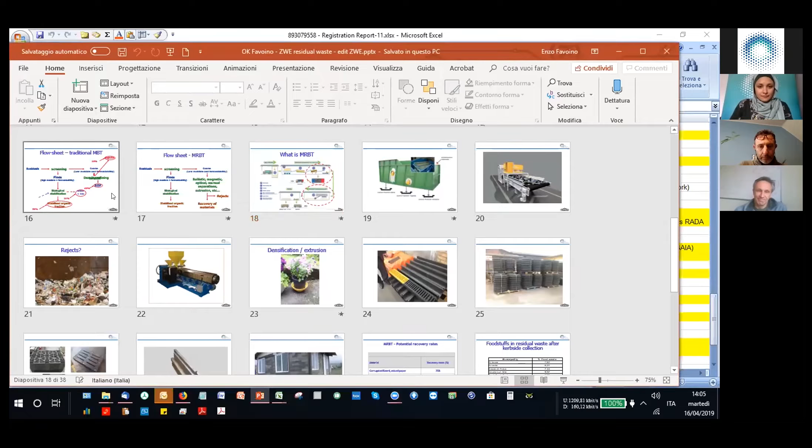Let us set the scene first. And since we know we have got a global audience today, really an impressive set of participants in this webinar, I will be making reference sometimes to the European situation, since it is really setting the scene when it comes to advanced waste management, in particular thanks to the recently approved circular economy package. But of course, I will always try to make reference to more global issues and a wider context.

Anyway, setting the scene. The circular economy agenda, not only in Europe, but also in other parts of the world, everybody's discussing circular economy, sustainable material management, and this is setting the bar higher. It tells us we have to keep ambitious when it comes to material recovery rates.

In particular, we have got a communication issued by the European Commission on the role of waste to energy in the circular economy. And it was dwelling on the possible tensions at the interface between infrastructure in thermal treatment, such as incineration, and the need to have higher and higher material recovery rates. Then we have got a plastic strategy, which was adopted by Europe as a framing document when it comes to management of plastics, and a soon to be issued directive on single-use plastics.

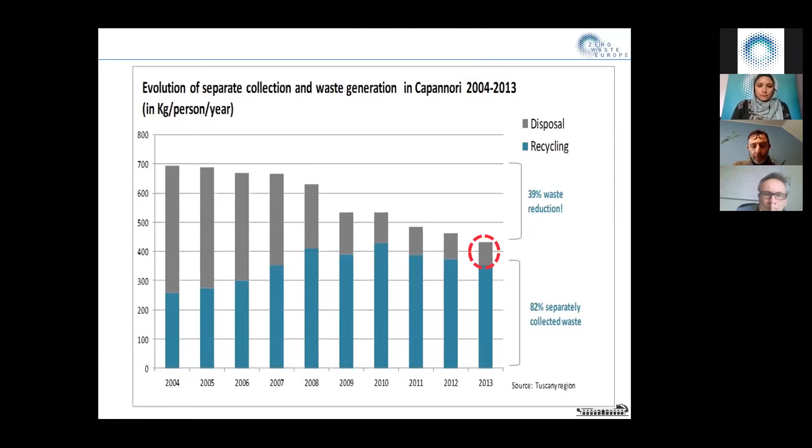But also, if we take a look at the average national data, this is a chart from a few years ago. Let me draw your attention to the data from Slovenia. Slovenia, a few years ago, was at 40%, which was already quite a promising result for an enlargement country, a Central Eastern European country, which was still implementing all the strategies coming from the body of European environmental policy.

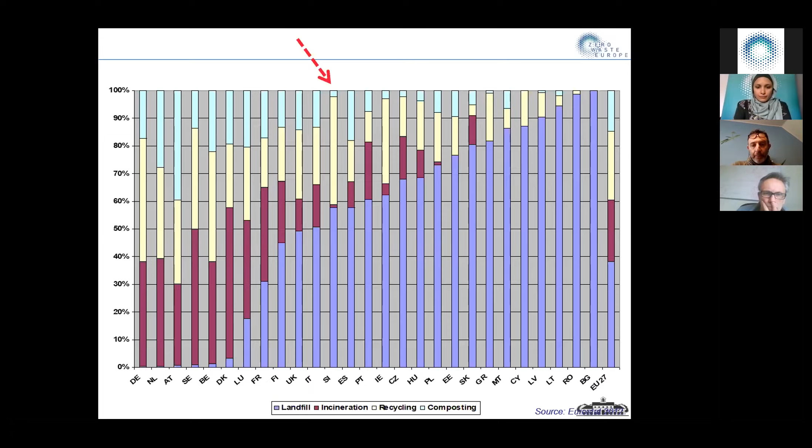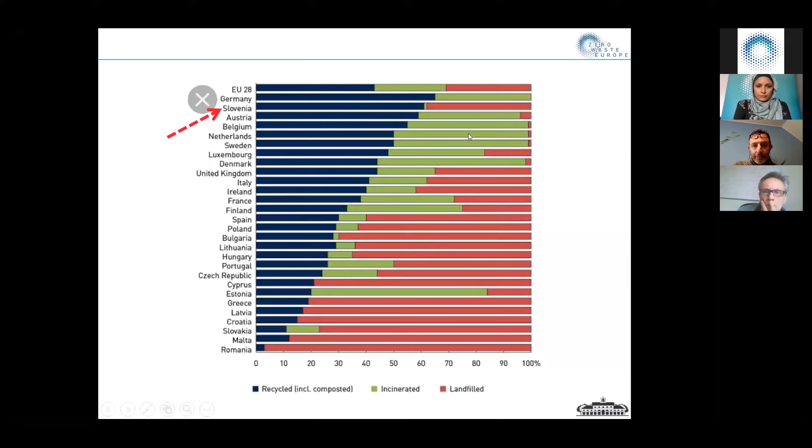But just a few years later, if you take a look once again at Slovenia, Slovenia is jumping on top of the standings for Europe and for the global rankings when it comes to recycling rates. And this is basically related to the fact that they have got a very low reliance on incineration, which is the green part of the bars. Let me try and use the pointer.

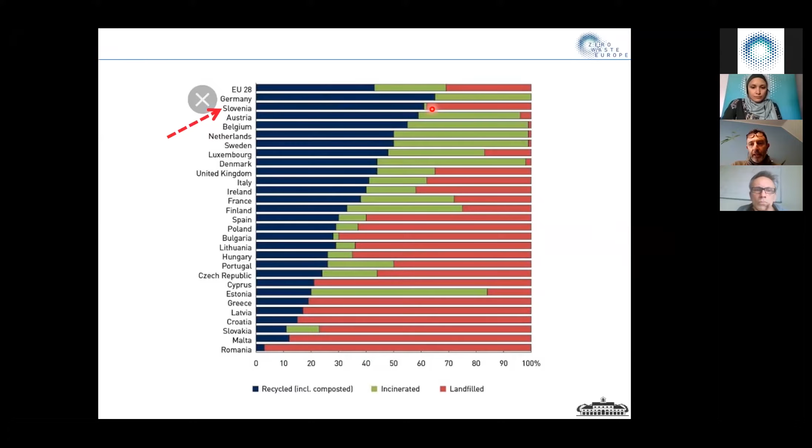Here you can see a very small part, which is reliance on incineration, which is keeping the system flexible, and therefore they can fully deploy the potential of zero waste programs, circular economy, and so on and so forth. By now, Slovenia should already be around 65 to 70% separate collection.

Also, if we take a more detailed look at some districts, waste management districts. For instance, the planning units in Italy are the provinces, which are basically corresponding to counties in the United Kingdom, Landkreise in Germany, départements in France, and so on and so forth. You can see that there's already a good bunch of provinces above 80%, and some of them are already down at 50 kilograms per inhabitant and year residual waste.

And you know, if a province totals a population roughly of 1 million people, this means that residual waste is just as little as 50,000 tons. So a few years ago, with 200 or 300 kilograms residual waste per inhabitant and year, residual waste was at 200,000 tons. But with as little as 50,000 tons, in a planning unit such as a province, it's hard to consider incineration with such a low amount of residual waste.

So what shall we do with residual waste? Because anyway, we have got some residual waste to manage. We need a transitional strategy for residual waste, and this is a global problem, of course. While we pave our ways towards zero waste, we still need to make decisions on transitional strategies for the management of residual waste. There are a few problems with incineration in an ever-changing context.

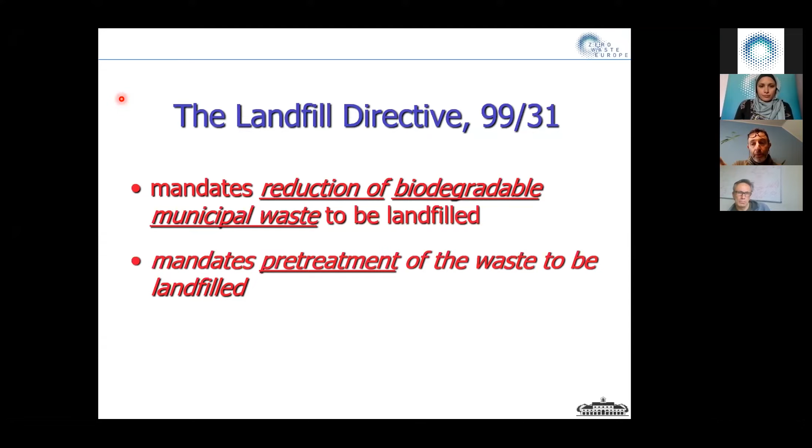But this calls for some type of pretreatment of residual waste, of course. Let's take a look at the way residual waste looks like, and let's go back to Capannori, which I already mentioned. Capannori at present is around 85% separate collection. This is a situation which is fairly widespread by now in different areas across Europe. Whenever you implement zero waste programs, roll out a curbside scheme, include the organics, and adopt a pay-as-you-throw system, you may get quite easily well above 75–80% separate collection.

But the main effect on the composition of residual waste in Capannori is that there is a sharp reduction in the percentage of organics. So let's keep it in mind, because this will affect the possibilities for managing residual waste and the connected needs. There is a concentration of other materials, such as plastics, because not only those plastics which have not been captured through separate collection - separate collection relies on behavioral change, and so much as we target perfection, we have to live with imperfection in daily behaviors by people - but there is also, most importantly, the effect of non-packaging plastics, which are not covered by EPR, extended producer responsibility, and therefore they tend to end up in residual waste, and they concentrate there.

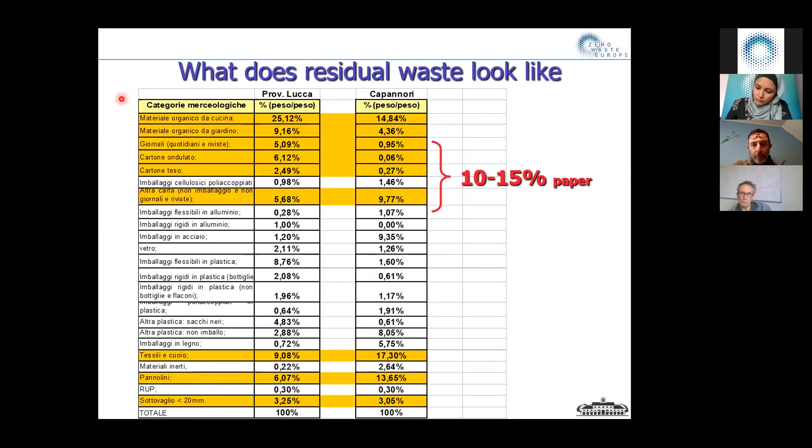So what might be the goals for a consistent residual waste management strategy? We may consider maximizing recovery of materials in order to get aligned with the circular economy vision. We have to minimize reliance on landfilling, of course, and minimize the impacts of landfilling as well. And so we have to minimize fermentability of whatever gets buried into a landfill. But most importantly, we have to keep the system flexible and adaptable in order to cope with the ever-increasing recycling rates and the ever-decreasing, minimizing amounts of residual waste.

This is why we defined a concept which goes under the acronym MRBT. It stands for Material Recovery Biological Treatment. There is a study you may download free of charge from the Zero Waste Europe website. That's a life cycle based study, and therefore it basically dwells on the impacts and environmental benefits of material recovery and biological treatment, whereas during the current presentation, I will mostly dwell on the operational implications and what is the operational potential of material recovery and biological treatments.

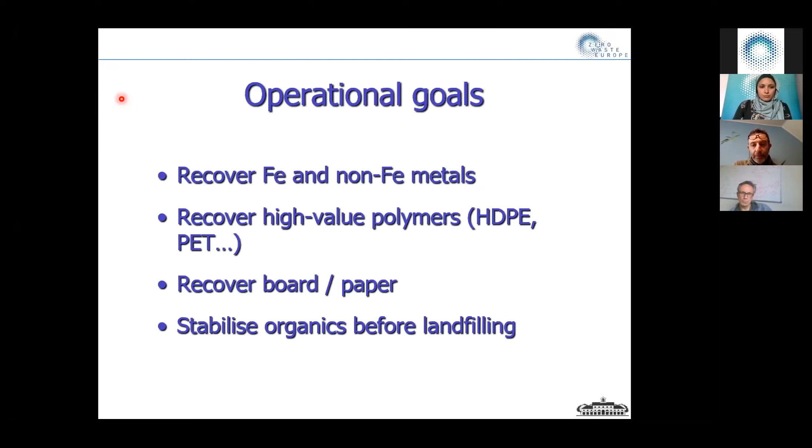So the operational goals - we have just seen the strategic goals - but the operational goals may be to recover metals, both ferrous and non-ferrous metals. This is one of the easiest things to be done, and it's ordinarily being done at whichever type of residual waste management site, since it's quite cheap and easy to recover metals. We may recover some high-value polymers still included in residual waste, such as HDPE, PET. We may recover some board and some paper, which is still included in residual waste. And we also have to consider stabilizing organics before landfilling in order to minimize fermentability of what gets landfilled.

So if we consider a flow sheet for traditional mechanical biological treatment, MRBT, Material Recovery Biological Treatment, is pretty much similar to mechanical biological treatment. And this gives the potential for converting many of the existing mechanical biological treatment sites into material recovery biological treatment sites without such big expenditures.

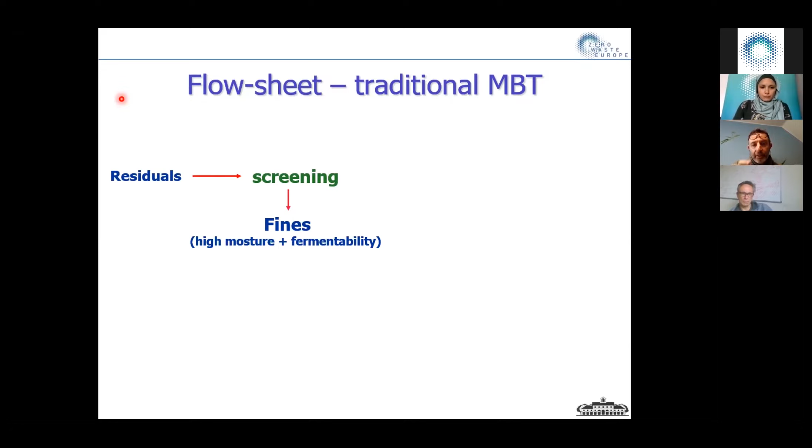You can see with a traditional MBT type of scheme, we have got residuals. They undergo some screening, it's dimensional separation. These screens out the fines where dirty organics are included. They show high moisture and fermentability. They may undergo biological stabilization, which is nothing more, nothing less than a compost-like type of process.

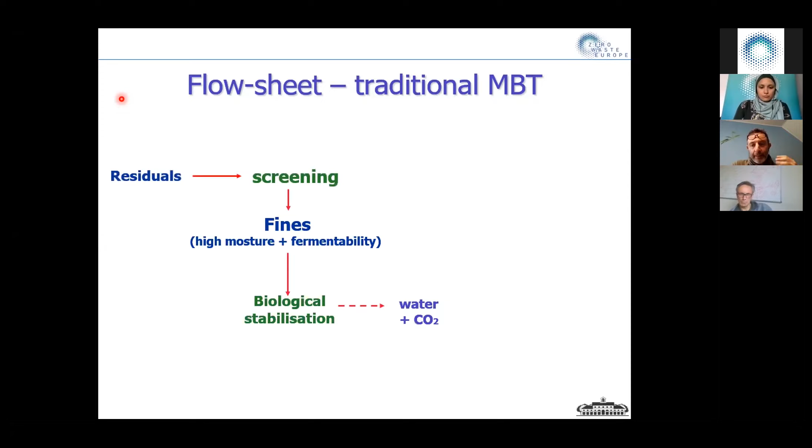It therefore has some process losses - water vapor, carbon dioxide - and in the end of the story, we have got a stabilized organic fraction with reduced fermentability.

On the other hand, from primary screening, we have got the coarse materials with low moisture and low fermentability, and they may be landfilled as they are, as a low fermentability material, or traditionally, most often they were undergoing some density refining in order to produce RDF, refuse derived fuel.

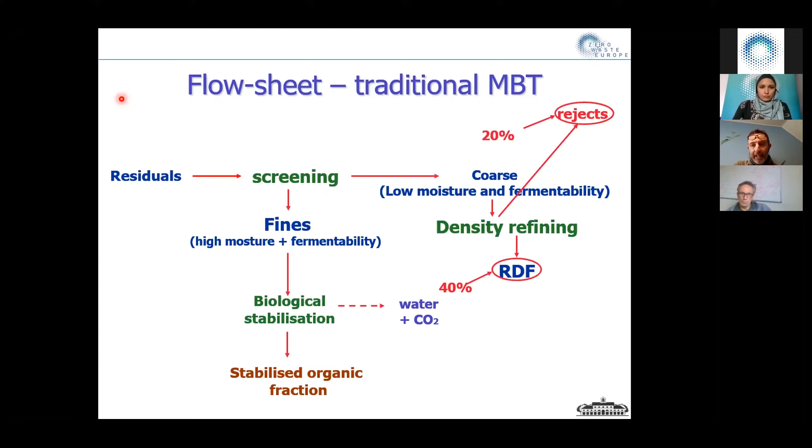There are some rejects from density refining. This is a typical mass balance: 20% rejects, 15% mass loss from process losses, water vapor and carbon dioxide, 40% RDF, and 25% stabilized organic fraction.

So in the end of the story, what goes into the landfill body would be 25% stabilized organic fraction, 20% rejects, and in case you don't refine RDF, also 40% RDF.

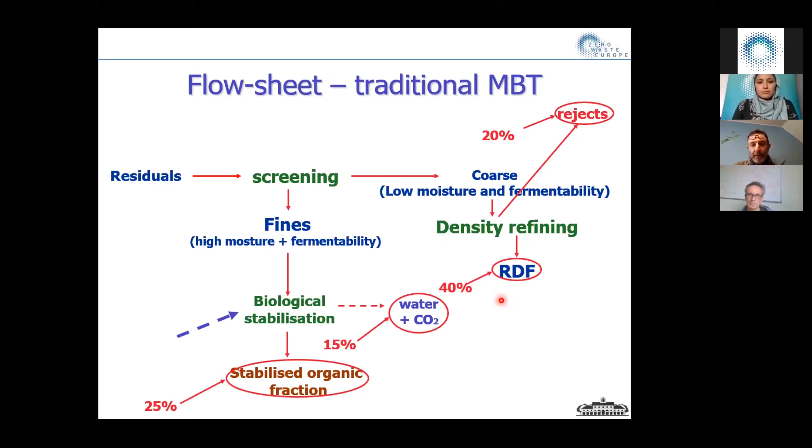But the most important thing is that the stabilized organic fraction underwent biological stabilization, and therefore fermentability and the impacts related to fermentability are minimized.

With MRBT, you have got a change in the operational scheme for the coarse materials, and they undergo sequential selection, such as ballistic separation, in order to separate bidimensional materials, such as plastic sheets and cardboard, and three-dimensional materials, such as bottles, cans, and so on.

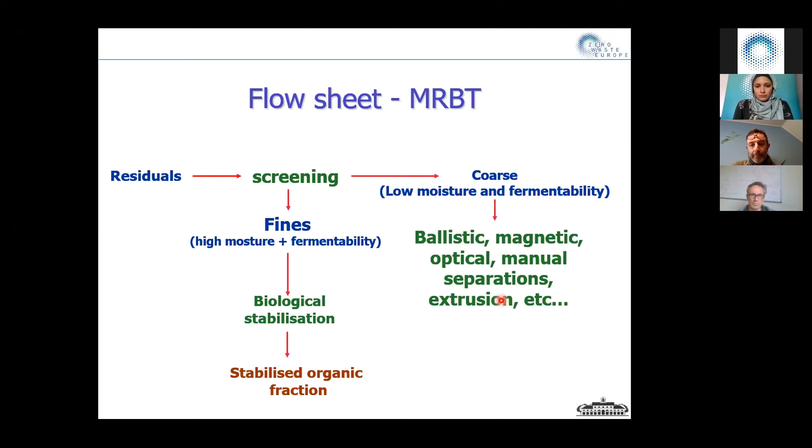Then on both streams, you may have magnetic separation, optical sorting in order to recover paper and high-value polymers, manual separations - for instance, for the big plastic sheets - extrusion for the low-grade mixed plastics, and so on and so forth. And so you may enhance and maximize recovery of materials.

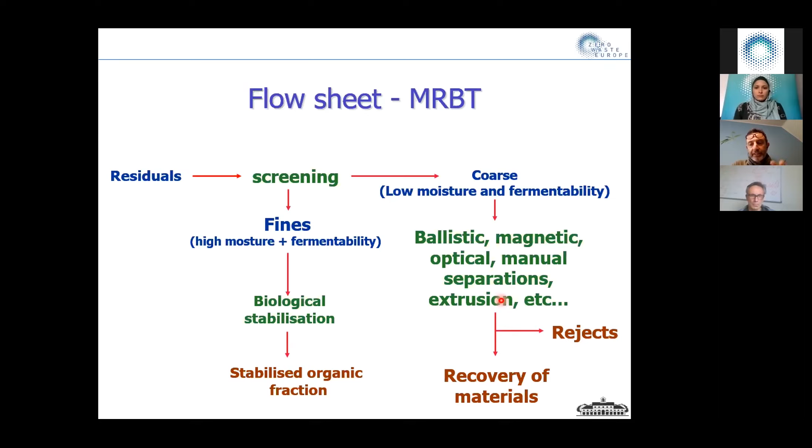Of course, also from separations, you tend to have some rejects which will have to go into a landfill.

So you understand that both may be, at a later stage, applied to materials coming from separate collection - clean organics from separate collection of organics, or plastics coming from separate collection of plastics.

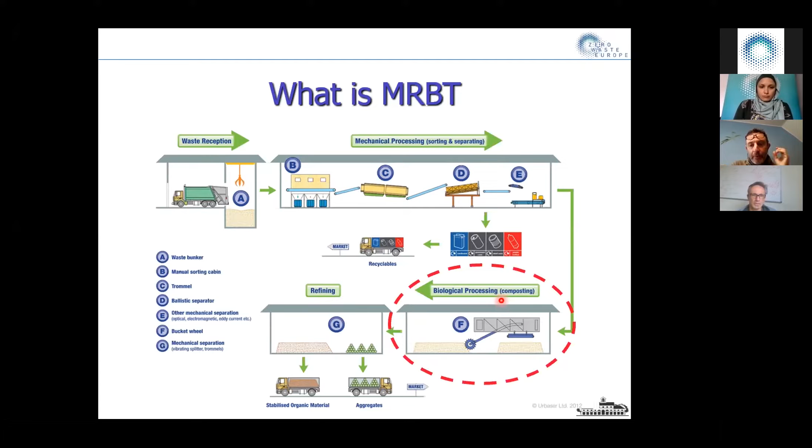So still keeping the financial balance, a financial viability of the system, you may work on dwindling amounts of residual waste, having them replaced by clean materials coming from separate collection.

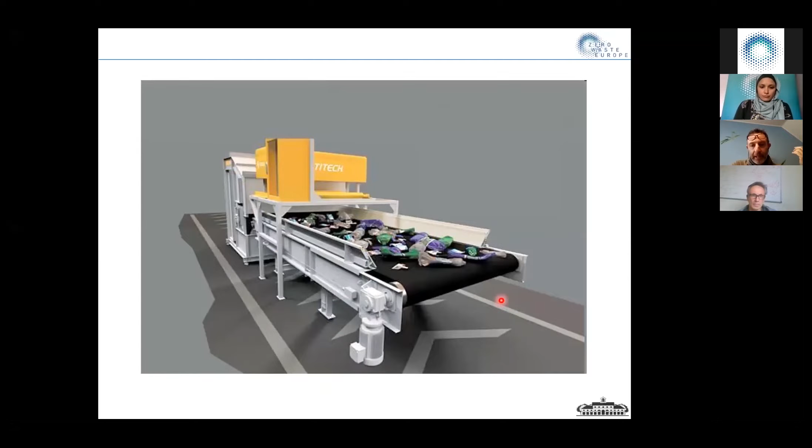These are some very quick examples of ballistic separation, the previous one. This is an optical sorter. Then you may have the end-of-line rejects from the optical sorting lines, which is basically mixed plastics.

And I find it hard to call them rejects. Actually, they may undergo some extrusion, and this may turn them into durable materials, such as pots, drainage pipes, and similar materials.

These are lids for manholes being used in place of the steel ones, and meeting the relevant standards for the sector. But as you can see at the bottom, they have got wooden pallets, so you understand what I'm thinking of.

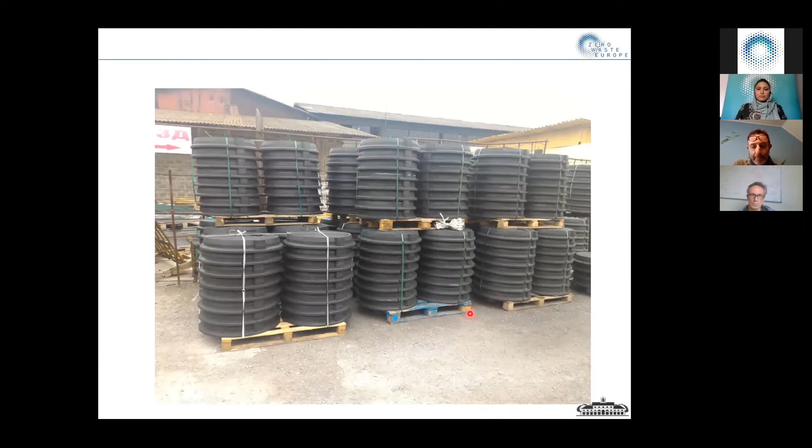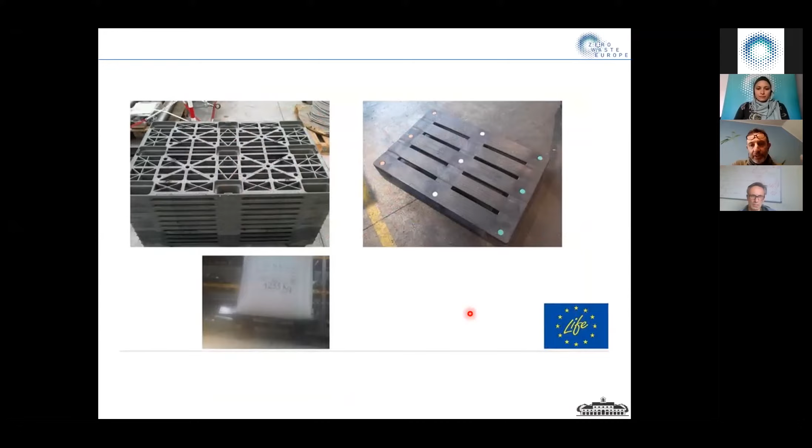What crosses my mind is the possibility to use such mixed heterogeneous plastics also to replace wooden pallets by means of plastic pallets. So it's always durable stuff which may be used again and again and again.

Or building blocks - this is Conceptos Plásticos. It's an initiative coming from South America to make housing also for poor people who can't afford having traditional houses.

So in the end of the story, they may meet relevant standards and they may be used for different applications. There are two preconditions for material recovery biological treatment to work efficiently.

One is technological evolution of dedicated equipment. By now, we have got very good potential recovery rates for

cellulose-based materials such as mixed paper and board, very high possibilities for optical sorting of different plastic polymers, and the highest sorting possibilities for metals.

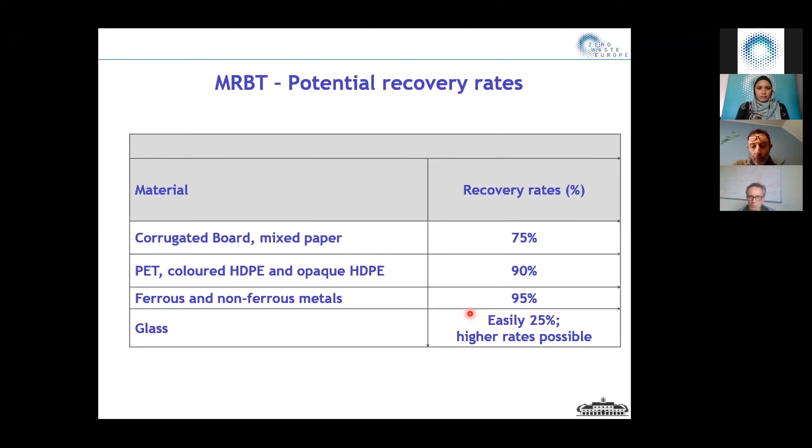For glass, it's lower. But another underlying condition is to have a very low percentage of organics in residual waste, because organics in residual waste makes residual waste dirty and sticky, and therefore the operational efficiency of the equipment would be low.

In Europe, there is a specific driver for separate collection of organics, established by Article 22 of the new Waste Framework Directive, which stipulates an obligation of separate collection of organics starting with 2024. So such situations will be more and more widespread.

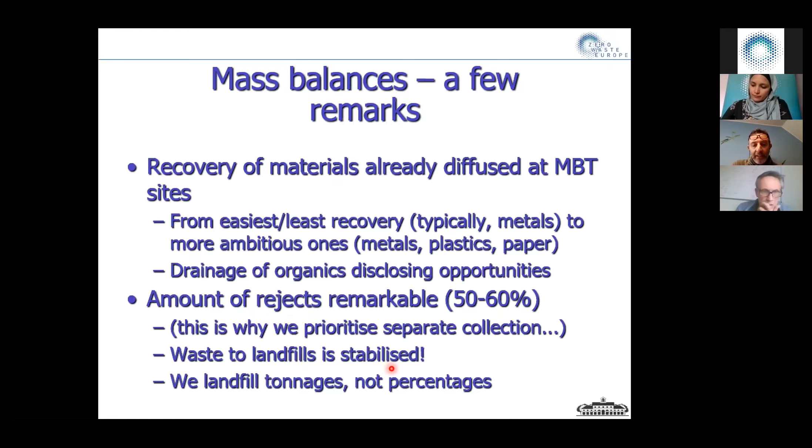In the end, waste we send to landfills is stabilized, and always remember, we are landfilling tonnages, not percentages. Consider: do you eat more if you get 100% of a cookie, or if you get 30% of a cake? You know what the answer is. 30% of a cake fills you much more than 100% of a cookie.

So basically, what we have to do in order to minimize landfilling is to keep the system flexible, so we may work on minimizing residual waste, so that percentages of rejects from management of residual waste apply to dwindling tonnages of residual waste.

In a zero waste district, they only produce as little as 350 kilograms per inhabitant per year. 85% of that is recycled, so residual waste is just as little as 50 kilograms per person per year. But above all, since they have no lock-in effect, because there is no incinerator there, they may keep working on maximizing separate collection rates and minimizing amounts of municipal solid waste.

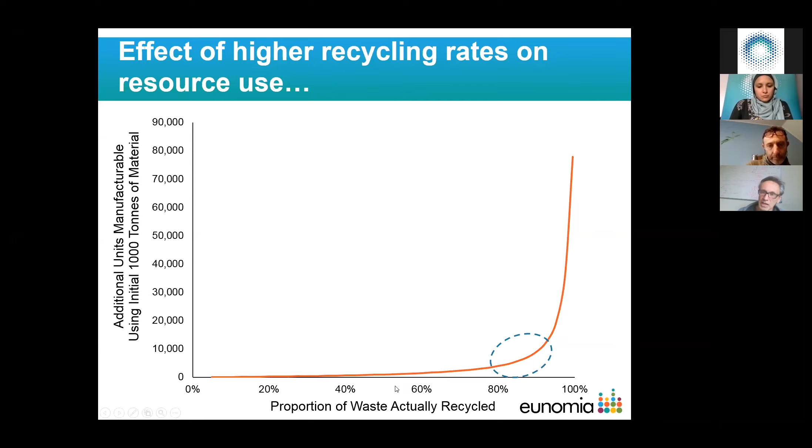That's why we're talking here about moving towards a circular economy. We want the impact of whatever consumption we are still responsible for to be creating less effect. And clearly, as we go to a much more circular economy, the impact of that consumption declines.

This is recent work we've been doing with the Welsh Government, which has already set itself an ambitious target of 70% recycling. Not all of those climate change gains have been made, even at 70% recycling. We can go further, and even going from 70% to 80%, we still find a significant improvement can be made.

And that's where we need to be moving if we're going to address the twin issues that confront our planet: climate change and resource constraints. They're two parts of the same coin.

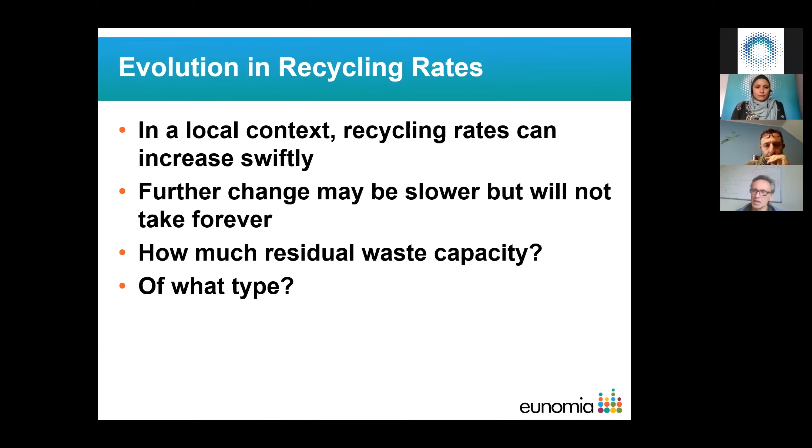And so in that context, you're faced with this question: how much residual waste capacity do I need, and of what type? These are really important questions that are being addressed by municipal waste managers literally day after day.

So landfill, do you know one of the best things about landfill is it's what we call a stock facility. It's something that's there and it doesn't have a fixed throughput. It fills up over time. And to some degree, you're not that worried about the pace at which it fills up. It doesn't completely drive the economics of the system. Of course it does to some extent.

But if your facility is filling up slightly more or slightly less from one year to the next, it doesn't matter so much. And that's one of the best things about landfill, possibly the only good thing about it, is it's really flexible. You can put as much or as little in from one year to the next as you're going. So if you're trying to develop your recycling system and you're worried about having too much residual waste treatment capacity or even too little, it's actually an interesting solution.

But of course, we know it's not great from the perspective of climate change. And one of the big issues is the emissions of methane. And there's a long discussion we could have on this webinar about how effective landfills really are at capturing the methane that's emitted from them. And you get very varied views on that. But there are also other emissions to atmosphere, volatile organic compounds, polycyclic aromatic hydrocarbons.

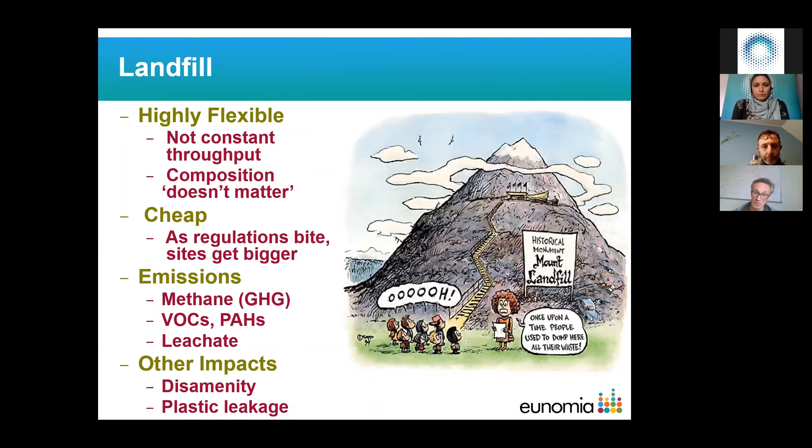And quite importantly these days, if we've got relatively poorly managed landfills and lots of plastics arriving onto those sites, then those plastics can blow around and they can easily escape into the environment. A lot of work is being done to understand just how much of that happens and to what degree in what places. Its key advantage, if you're looking at zero waste, is that it's flexible to the change in the quantity that you're sending there. The key drawback, though, of course, is its environmental impacts.

Now, incineration is often touted, of course, as the solution. It is much more capital intense, as Enzo was saying. Instead of being 250 or so for MBT, it might be around €1,000 per tonne, maybe a little lower. But it's relatively inflexible in terms of the economics, in that it commands a constant throughput. It's quite difficult to go to a bank and say, I'm going to build this incinerator tomorrow. Can I get a loan from you to build it?

And if you're asking the bank for that money, they'll generally ask, okay, well, how much can you guarantee that you're going to be treating from one year to the next? And so what often happens, not always, is that in the contracts struck between municipalities and the operators of incineration companies there may be an agreement to supply the material to that facility. And there may even be a minimum tonnage guarantee within that contract to underpin the financing of that facility. And so it can start to pull waste in. And a lot of people say, well, incineration can undermine recycling.

In terms of the environmental forms, it's quite interesting because Enzo was showing how the composition of residual waste might look. Composition of residual waste is really a fascinating issue because everybody tends to concentrate, when they're talking about a particular material, on what that means for the residual waste. But if I captured 70% of every material that was in the waste stream, I'd have 30% of everything left. And the composition of what I was left with would look exactly the same as what I started with, in principle.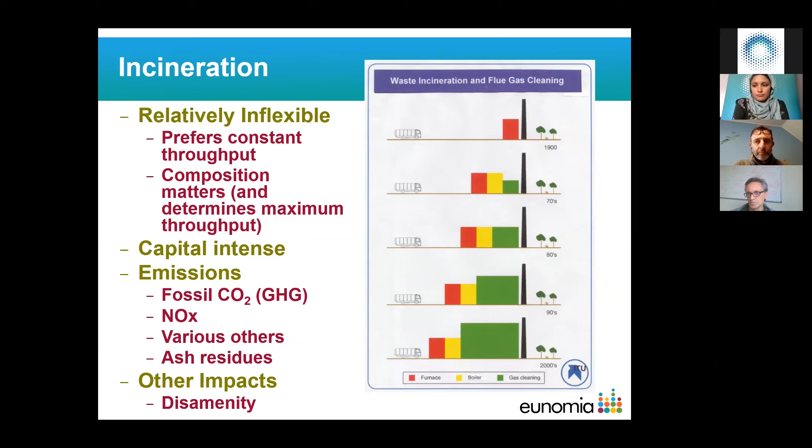The other impacts are, again, disamenity, and those tend to be even higher for incineration plants, partly because of where they're located, because the disamenity is partly a function of the housing density around the facility. So, is that a problem? I literally did this for this presentation today.

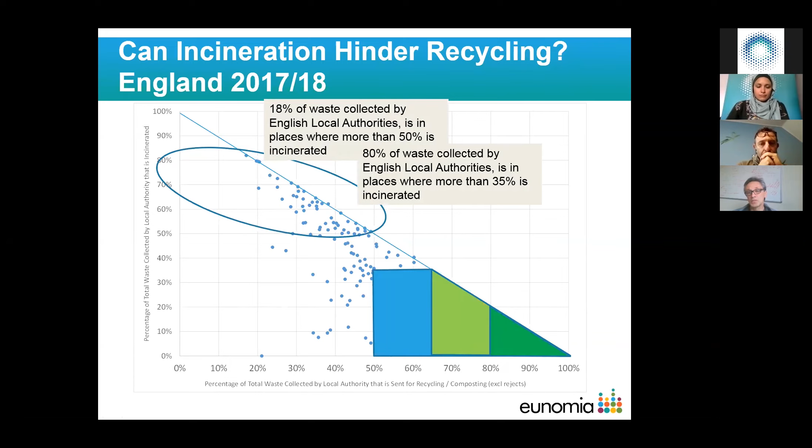And what's interesting is 18% of waste collected by English local authorities is in places where more than 50% of the waste is incinerated. If I want to get to 65% recycling, I've got an even bigger problem facing me, because 80% of the waste that's collected by English local authorities is in places where more than 35% is being incinerated.

So doing the mathematics around that, if those authorities can't change the amount that they're incinerating and can't reduce that, then the remaining authorities who aren't doing more than 35% incineration don't have to meet 65% recycling, they have to do 75% for the whole country to get to the 65% target. Now the detail will depend on the contracts, but it shows how incineration can sort of get in the way.

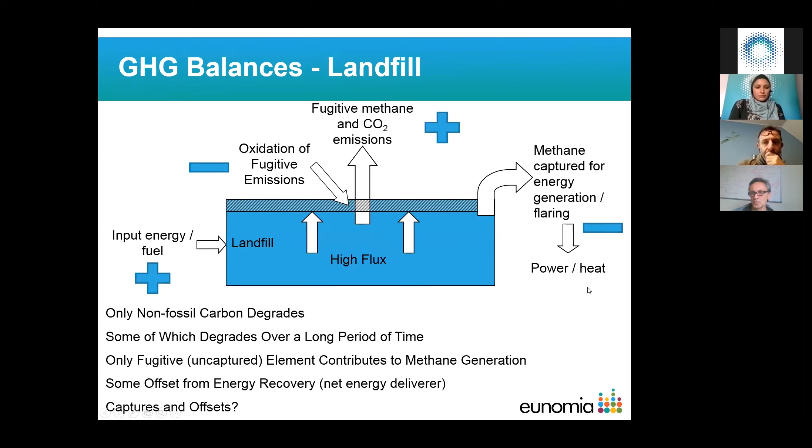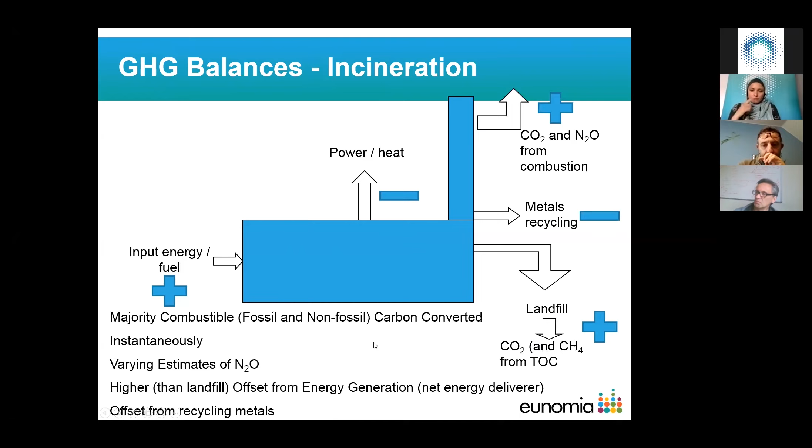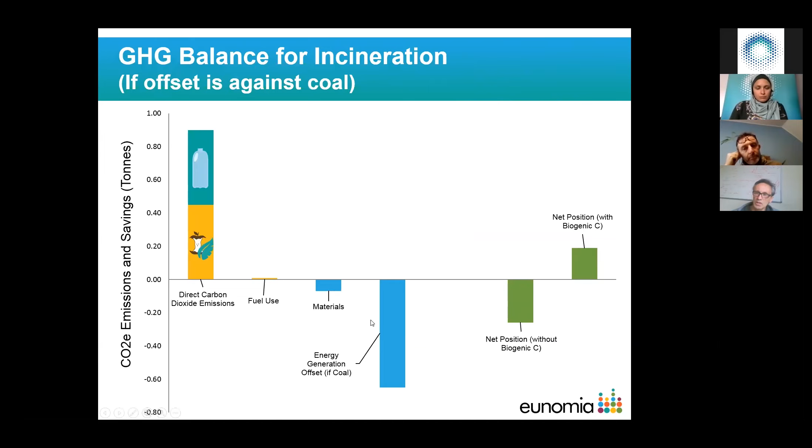And my net position, if I ignore, as international convention says I should, the contribution from the non-fossil element, from the food waste, the garden waste, and so forth, that position, I can almost say, well, look, I'm making a good contribution to climate change. It's great, isn't it? Okay, yeah, but that's because I was assuming I was avoiding generating energy from coal, and coal's a carbon-intense fuel. We're completely in a nightmare situation if forever we're going to assume that the source of electricity we're going to use is coal.

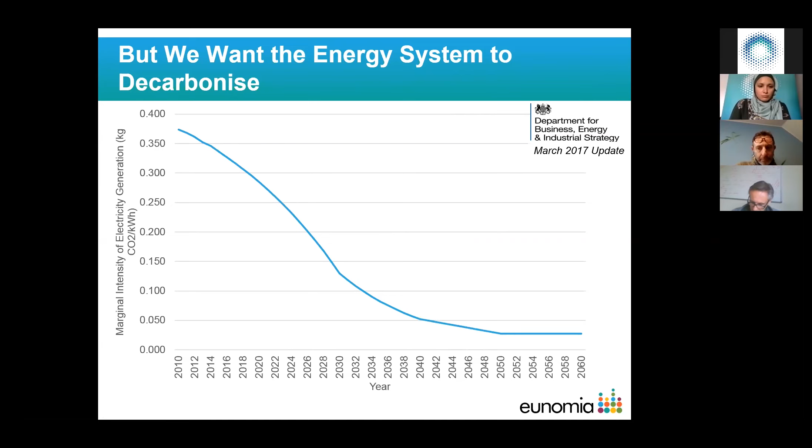If you're saying that one of the key benefits of your facility is the generation of energy, you have to consider what the benefit of that might look like over time. That will vary depending on whether you're generating electricity or whether you're generating heat, because we expect heat to decarbonize slightly more slowly than electricity. And so it may be that a better option for incinerators, for example, is to be focusing more on the use of the energy as heat than as electricity.

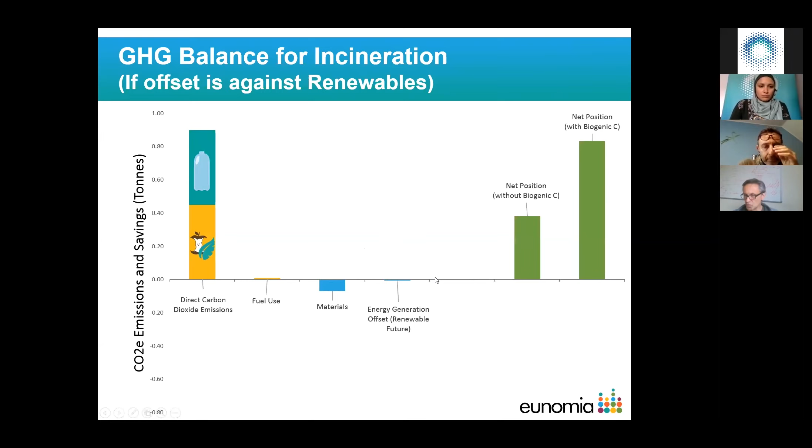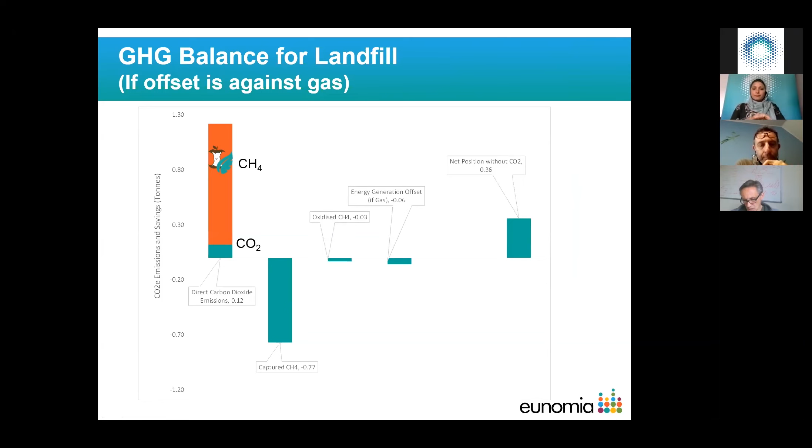So to sum up, if we think the best option of those ones we've been looking at is where we are burning waste and we're assuming we're avoiding coal-fired power generation. But in the UK, we just banned coal-fired power generation. We can't claim that we're going to be displacing coal-fired power generation anymore. And if any one country is claiming that that's the background source of electricity, then frankly, we can all go home and live underwater in 20 years' time. We've got to face this crisis.

So a landfill that has 70% gas capture, which is more or less what my government assumes, if I exclude the biogenic CO2, which is what the international approaches say I should do, then I'm basically into a pretty decent situation where I'm assuming I'm avoiding gas-fired generation. And at that point, I'm more or less in the same situation as an incineration plant.

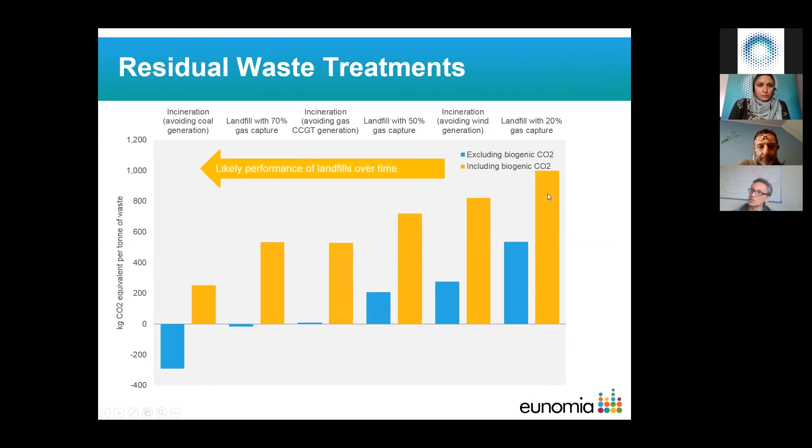A landfill with 50% gas capture is, of course, worse than a landfill with 70% gas capture. And an incinerator avoiding renewables, wind power generation, is worse than an incinerator that's avoiding gas generation. And a landfill with 20% gas capture is worse. But over time, that's the likely performance of landfills as they get better at capturing the gas. Over time, that's the likely direction of performance of an incineration plant, because the principal determinant of that effect is the decarbonisation of the energy system.

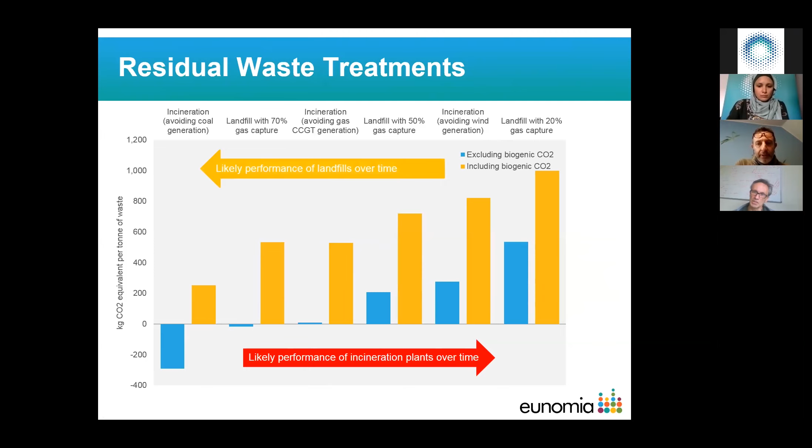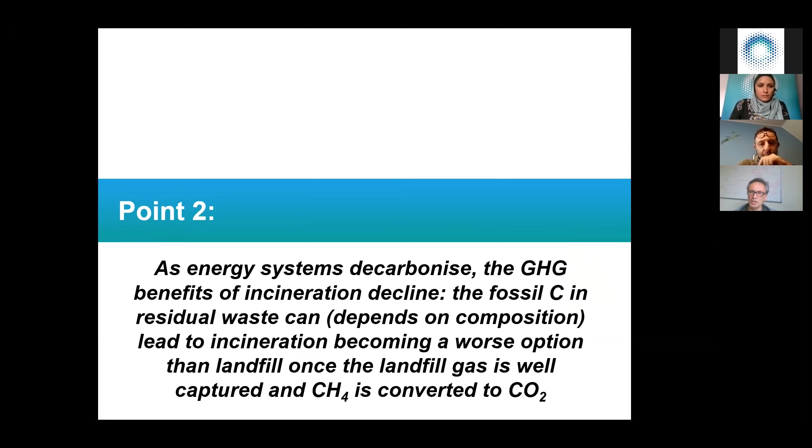So, as energy systems decarbonise, greenhouse gas benefits decline. Okay, we're in an interesting situation. Point 2. So, it's not the case that incineration will forever and always be better than a landfill. But that doesn't mean landfill's good. It just means incineration is not as good as it was in the past. So what's the best thing to do?

So first of all, Enzo is talking about sorting waste. I'm not going to spend a lot of time on the technology, but what's happened is we've got far better resolution in the sorting, far faster speed of the sorting, cheaper sorting. And we can now get marketable outputs from the metals, from the plastics, and increasingly, even from mixed waste, we can take out waste, separate it by polymer and by color. We can then take it through a hot washing process and take it back to next to virgin quality material.

Not just the extrusion that Enzo was talking about, but high quality polypropylene, PET if it's not already collected in a deposit scheme, and so forth. We can get high quality material through the hot washing processes. We can get some paper and card, we can get glass, and we can get some inerts. Of course, we don't get anything like the quality of paper and card as we get through separate collection systems. It may be more difficult to get really well color sorted glass.

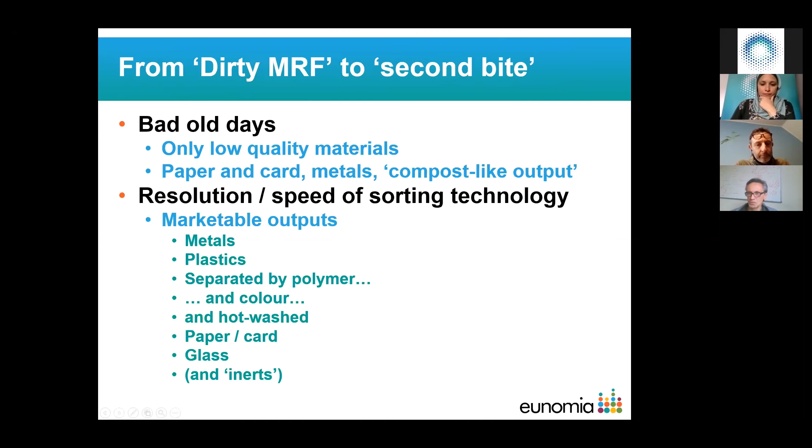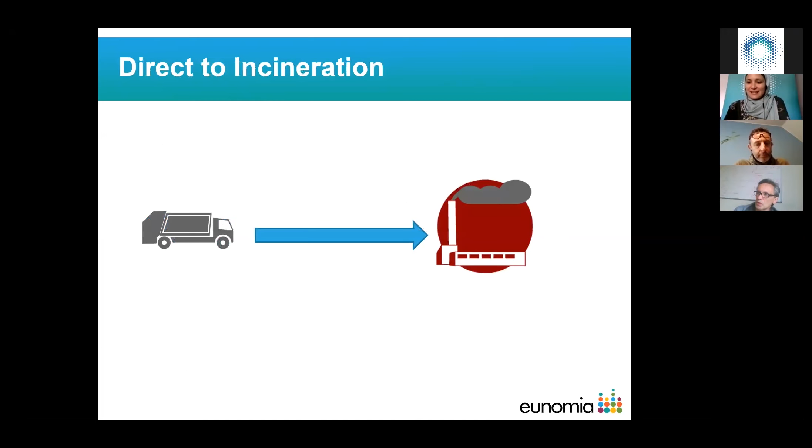Dominic, just to let you know that we are starting to go above time. I'll quickly go through to the end then.

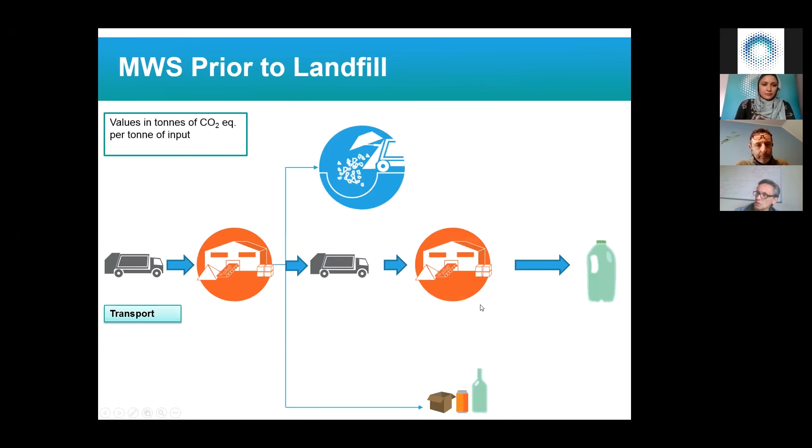I'm going to show you some comparisons when we put a mixed waste sorting facility in front of an incinerator. The effect on the climate change impacts: we see a significant reduction of more or less 0.4 tons of CO2 per ton of waste input. That's really significant. Guess what? We get something similar when we do the same thing on the front of a landfill. So the benefits are around the same sort of figure, slightly less, because we've got a really significant impact when we put this at the front of an incineration plant, because we're taking out the fossil carbon that's going up into the sky.

So mixed waste sorting improves the performance of both landfill and incineration systems. And for incineration, this improvement is really boosted by that removal of the plastics and the fossil carbon that otherwise goes up the stack. And the key point here is that no one should be sending anything anymore directly to a landfill or an incineration plant.

So let's put the final piece on this jigsaw, because of what was left of those emissions from the landfill. You can see here we still had on the landfill a significant contribution being made even after we've taken out all of this material. Now that's mainly methane. It's biogenic material that's degrading, and it's uncaptured methane. How do we deal with that?

Well, stabilization, as Enzo was talking about, is like a composting process. And this shows what happens to the tendency for the material to generate gas, methane, as we go through a treatment period within a composting type process. And it shows that we might have a material that tends to generate a lot of gas at the start.

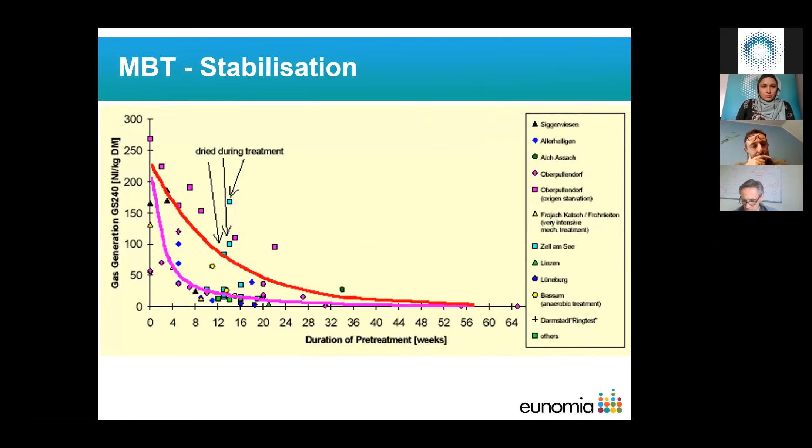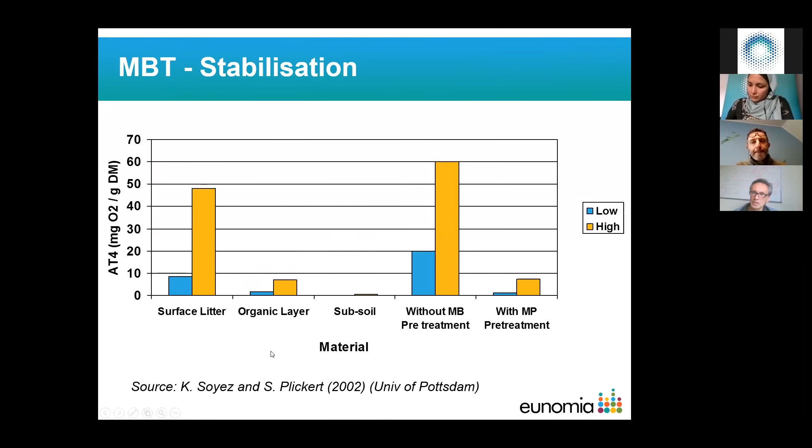We compost it down, and over time it becomes much less likely to generate gas when it's landfilled. That's important, because if we can convert this stuff that has a tendency to generate methane into carbon dioxide, a much less potent greenhouse gas, we effectively address that landfill gas. Through this stabilization process of the organic matter, we end up with a material that has less tendency to generate gas, a little like the organic layer of the soil. It's starting to look relatively inert.

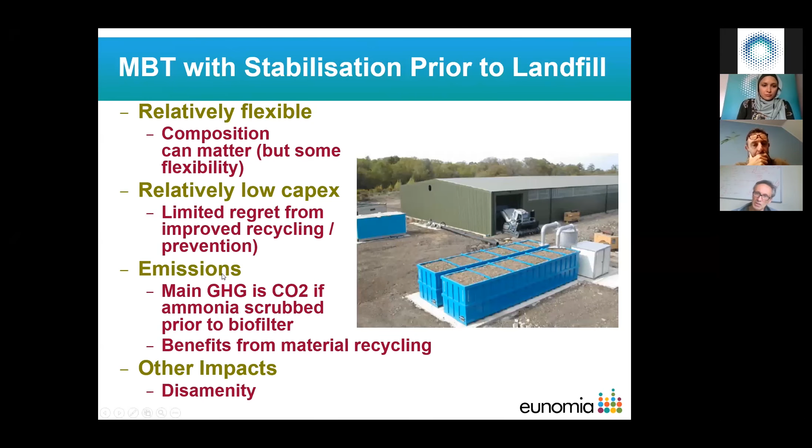As Enzo was saying, this can be relatively flexible, relatively low capital cost. The key point for greenhouse gases is that the main one is carbon dioxide, as long as the ammonia from the degradation process is scrubbed out before it goes into the biofilter. If it isn't, that ammonia can be converted into nitrous oxide, which is a very potent greenhouse gas. Here's the schematic, but let me summarize the results.

If I now put mixed waste sorting and stabilization together, I lose the vast majority of those emissions that were previously coming from the landfill. Now I've got the best performing system of the ones I looked at. I've generated greenhouse gas benefits from taking out the material, and I've stabilized it, removing its potential to generate gas when subsequently landfilled.

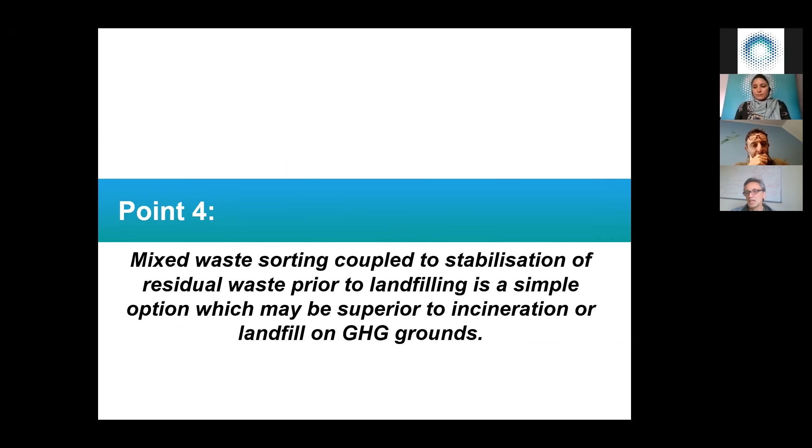So finally, summary for strategy. What did we learn? Mixed waste sorting improves the situation whether for landfill or incineration. But if we want a flexible treatment, we might not want incineration. But we might not want direct landfill either. We've got greenhouse gases, we've got plastic blow-off from management of the site.

So step 1, mixed waste sorting. Step 2, stabilization of the organic fraction. Relatively low capital, potentially lowest greenhouse gases.

From the policymaker's perspective, please don't ban landfilling completely. Don't do it, because you end up pushing people towards incineration. Don't tax all landfills in the same way. You could do what they did in Austria and set a much lower rate for stabilized bio-waste - basically set a differential between the tax for unstabilized waste and stabilized waste that drives people to implement that stabilization process.

Do think about taxing incineration, particularly the fossil-derived carbon dioxide, encouraging people to take out, through mixed waste sorting, the material that contains the fossil carbon. And do think about taxing those NOx externalities, because we have air quality problems in many cities, and we're tending to miss that it's not just transport sources, but also stationary sources like incineration plants that contribute to that problem.

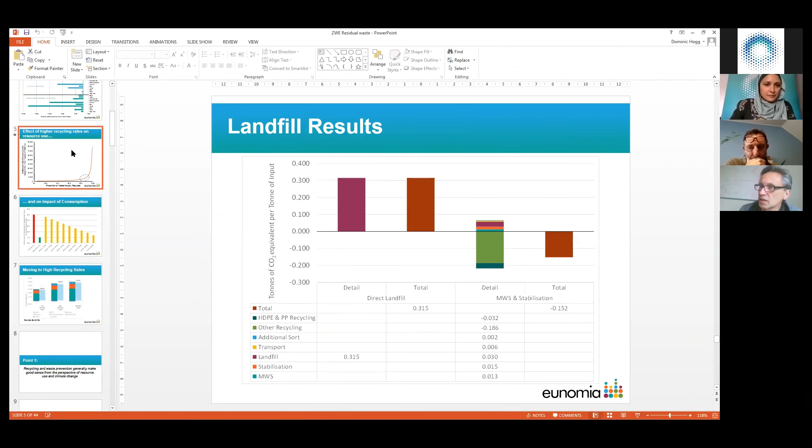Okay, can I just go back to the screen picture again? Because it wasn't actually about greenhouse gases in that picture - that wasn't the graph. It's this one, I think. So I wasn't talking about greenhouse gases, I was talking about resource use.

If I imagine I've got a ton of material used to make a particular product: if I recycle that material at 50%, then from that material I can make 2 tons of that product. If I go from there to 80% recycling, from that initial ton of material I can then make 5 tons of that product. And if I go to 90%, I can actually make 10 tons of that product.

So I've doubled the amount of material I can make by going from 80% to 90%. That's because the mathematics of that is 1 divided by 1 minus the recycling rate. 1 divided by 1 minus 0.8 is 1 divided by 0.2, which is 5. 1 divided by 1 minus 0.9 is 1 divided by 0.1, which is 10. I can make 10 times as much stuff at 90% as I started with. I can only make 5 times as much at 80%. And that's why this graphic, I rather like it.

We don't tend to think of recycling rates in that way.

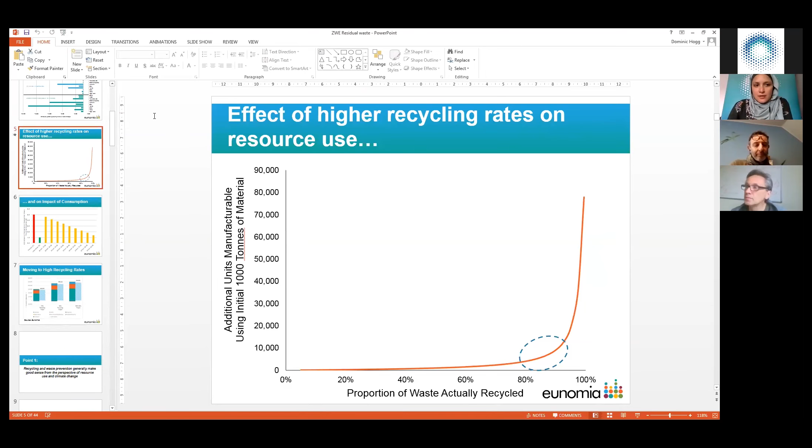There was a question from Jacques who was asking if you did the same kind of analysis between composting, methanization and vermicomposting. We have done that in the past, yeah. We've done most things.

I can't remember exactly what it came out with, but there were some studies being done in the UK in the last decade around that. We did some analysis, I can dig it out, and that tends to be, of course, of the separately collected material. We're talking more today about the residual waste.

I can forward some analyses we've done on that in the past, particularly around, for example, benefits around anaerobic digestion versus composting, for which incidentally those online might like to know the benefits are strongly influenced by how you use the biogas. Again, going back to how much carbon you can displace through the use of the biogas, you're better off generally today trying to displace transport fuel.

So you have to clean up the gas and then put it into vehicles that can take dual fuel or CNG, compressed natural gas. Then you're probably better off putting the gas straight into the grid, directly displacing gas, but again, you need to clean up. Finally, probably electricity.

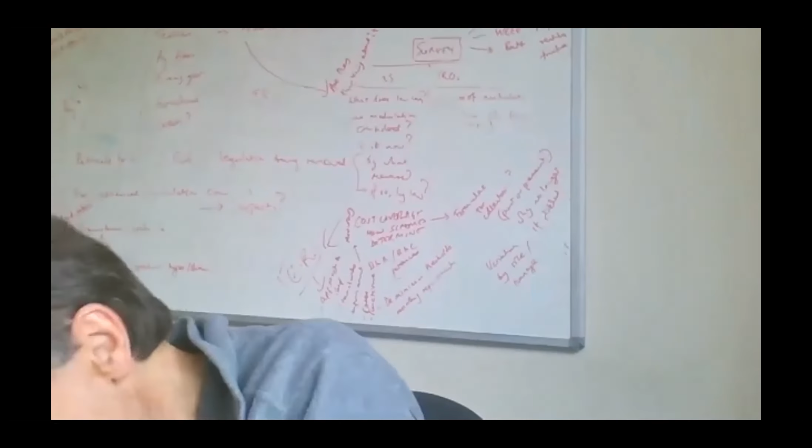Thanks, Dominic. Enzo? Yeah, if I may top it up, since the question was coming from Switzerland, was it? That's not from me, it was from Dominic. No. But the comment about the landfill did come from colleagues from Switzerland, but not only, Austria as well. This is why I was referring to Switzerland.

Switzerland, from an historical standpoint, alongside Germany and Austria, have been the best countries in Europe and basically around the world when it comes to recycling rates. But a few decades ago, I would have said, the fact you are the best ones doesn't mean you are perfect - there's still a long way to go. Even when you get to 50%, you've still got 50 precious steps to take towards perfection.

And even at 90%, there's an increasing number of municipalities in Europe at 90% separate collection, but they are still 10 steps away from perfection.

But let me go back to Switzerland. Basically, the first thing I would do in order to minimize landfilling, including landfilling of ashes and slags, would be to minimize residual waste. Unfortunately, Switzerland to some extent had a lock-in situation, above all based on put-or-pay contracts and the fact that incineration capacity is basically run by the same public waste management companies which are also dealing with separate collection.

So basically Switzerland has been moving quite slowly towards increased separate collection rates. But if you consider Slovenia, I touched upon it not by chance, because Slovenia is really jumping to the top of the standings and is set to be the first country in Europe and worldwide to achieve the material recovery targets set by the circular economy package for 2035. Probably in the next few years, they will already be at 65% net material recovery.